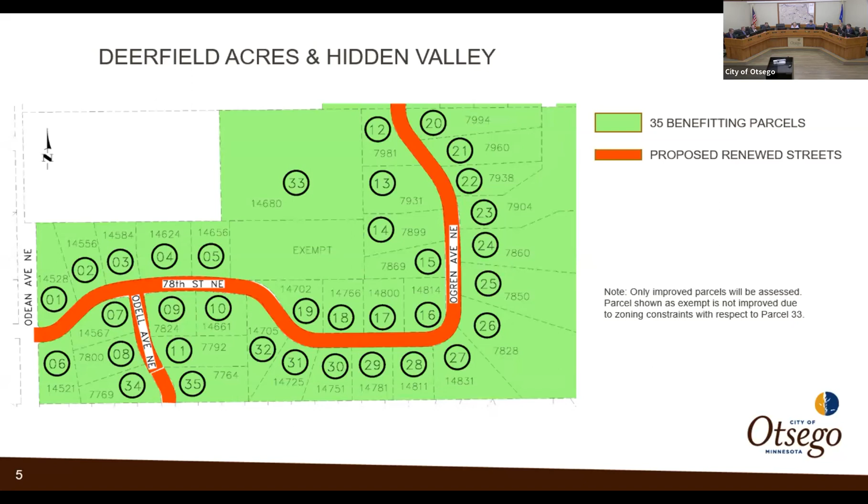If this project goes forward, the reconstruction would happen in 2023. Two years later, we come back and do a fog seal, which is a thin layer of oil that keeps the surface of the pavement from getting too rough early, keeps the fines in it, and seals some of the minor cracks. Then seven years after we've reconstructed it, you'll get a seal coat.

That's a little thicker layer of oil with some rock in it, and then we put a fog seal on top of that to hold the rock in. That lengthens the life of the road and gives a good surface for traffic.

Then 17 years afterwards, we do a micro surface, which is a 3/8 inch thick pavement that fills the cracks and some imperfections within the pavement, and that usually lasts at least another 10 years. So before we'd be back there for an overlay, you're looking at 27 years. Then an overlay would occur, bringing you out another 12 to 14 years, so you're looking at a life cycle of about 50 years.

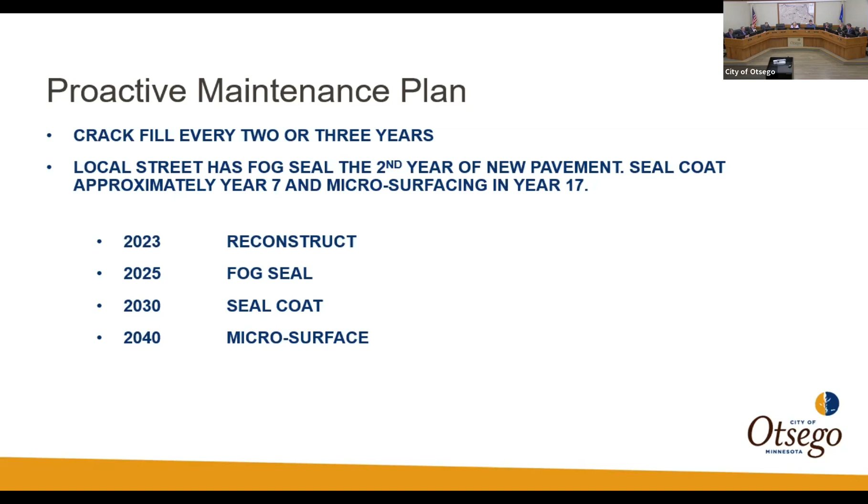As we go through this project, you'll see that the first go-around has been about 50 years. Out there today, Otsego Acres First and Second Additions were paved in 1982, so that's 41 years ago. Then we did an overlay in 1999, which was 24 years ago.

The width of the roads on all these developments is somewhere between 21 and 23 feet. What you do is a pavement condition index every year throughout the city, and that way we know which streets are becoming the worst, so those move up or down the scale for reconstruction.

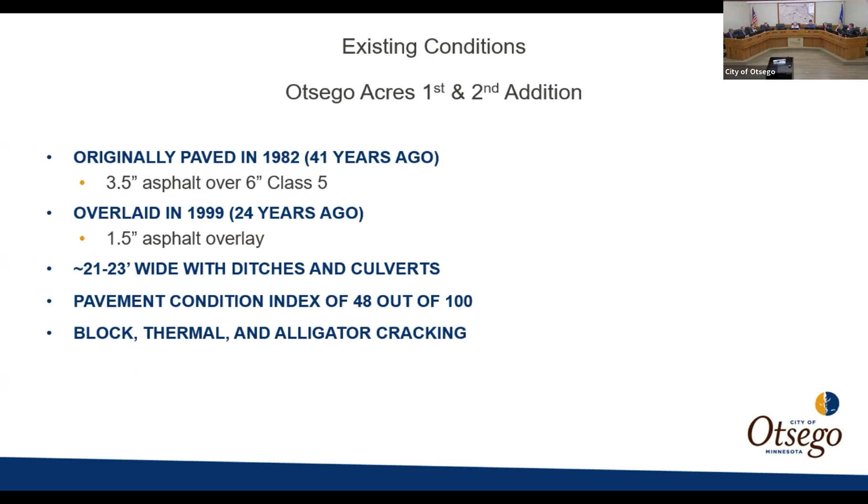Otsego Acres First and Second Addition are some of the worst in the city, at a 48 out of 100. That's why this project is being brought forward tonight. If you've been out there, there's a lot of thermal cracking, block cracking, alligator cracking, and a lot of patches. The same goes for Vasseur's Oak Grove Estates First and Second, and Deerfield Acres and Hidden Valley.

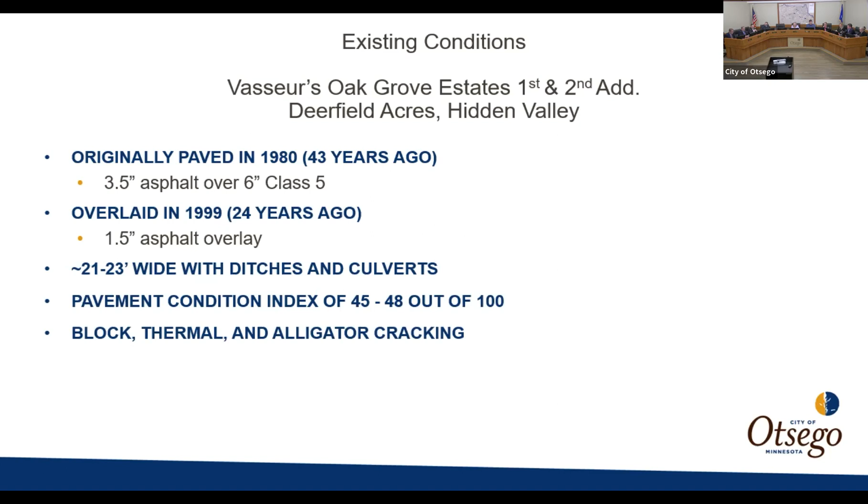Those areas are a little bit older, from 1980. Again, we overlaid it in 1999. They have about the same width of streets and about the same pavement condition index, with similar cracking and patching. Here are some photos of some of the areas—this would probably be Vasseur's Oak Grove Estates.

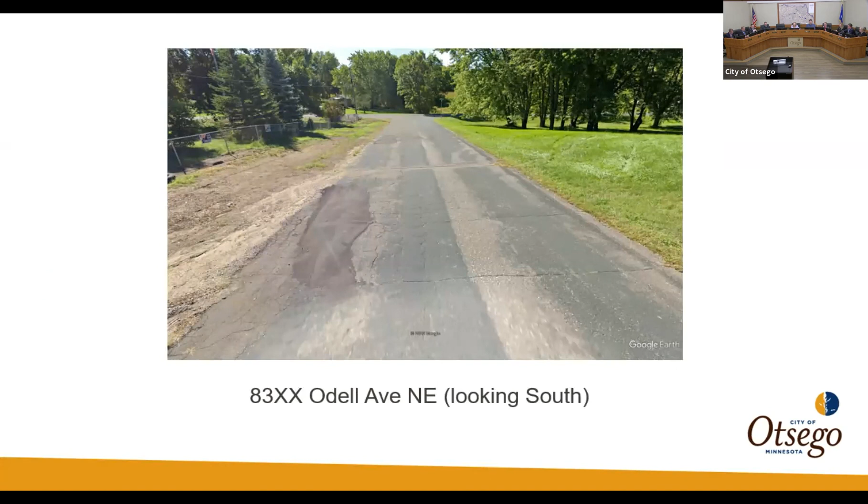So what we're planning to do is reclaim the road, bringing a large piece of machinery out there that grinds the asphalt on the surface and mixes it with the gravel underneath. If there are centerline culverts out there, we're going to replace them because it's already 50 years old, and we want those culverts to last another 50 years without having to rip up your new street.

After they pack that gravel back down and reshape it, you'll still have all the strength that was with that pavement before. Now we're going to add 3.5 inches of new asphalt on top of that, bringing the elevation of the street up 3.5 to 4 inches higher.

We will have to go into some driveways and mill to make that match as smooth as possible. If you have a concrete driveway, we'll saw cut it to the nearest joint and re-pour it to match the street. Gravel driveways are a little easier—we just add some gravel to bring that elevation up to the new road.

We don't expect a lot of landscaping for this project because we're strictly working on the street—redoing the street, putting the new pavement on, and then putting a small shoulder on either side of it.

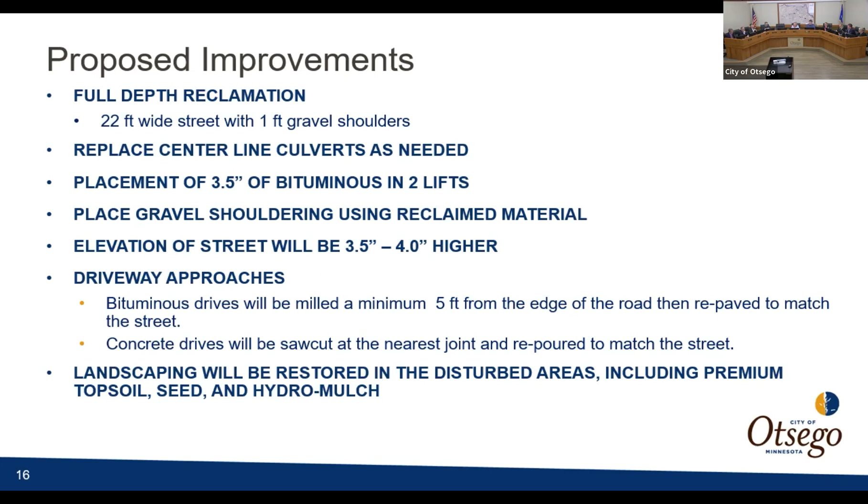So these are typical sections, as if you cut the road like you're slicing bread. Existing right now, it's got about 3.5 inches of asphalt on it with 6 inches of Class 5 below it. That gives a gravel equivalency of about 12, which is how we figure out the strength of streets.

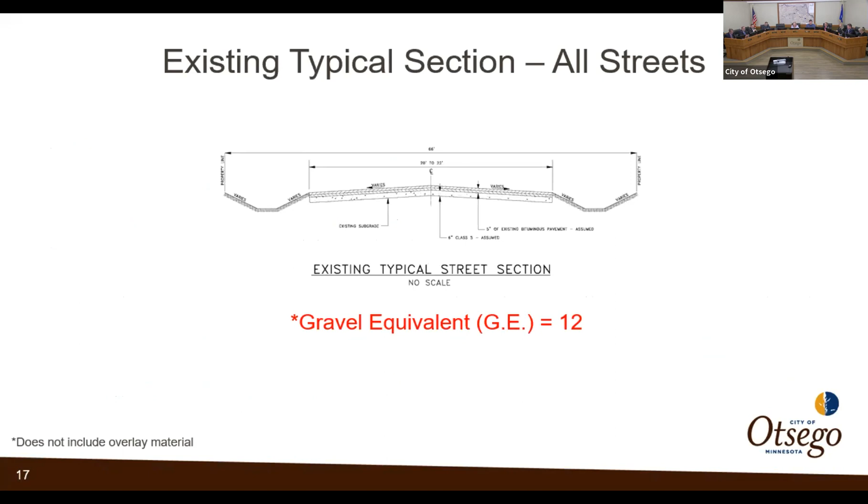In the proposed section, we're turning that existing asphalt, mixing it with the gravel below, and then adding another 3.5 inches of asphalt. So you're saving all that strength by leaving it on site, and gaining about 50% strength, with a gravel equivalency here of 18.

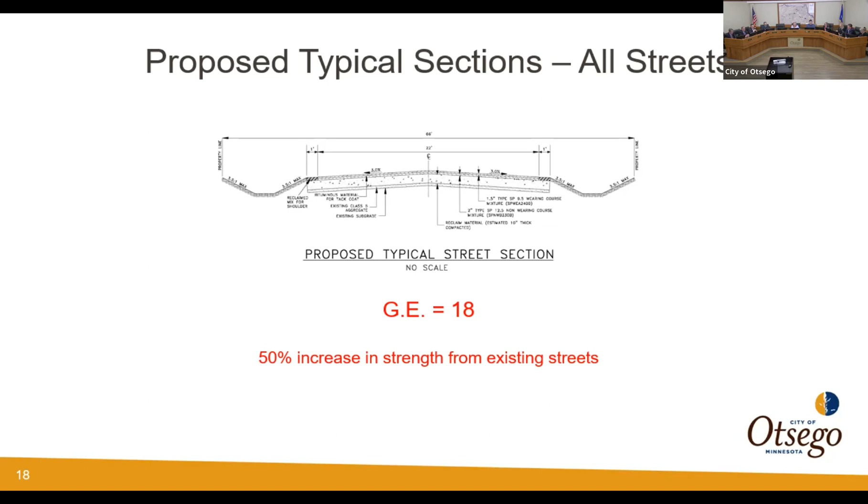So if the project does move forward—right now we've brought the feasibility report to the council back in January, held an open house last week on Wednesday, and we're holding the public hearing tonight. The council has the option to authorize plans and specs tonight, and if they do have us go forward, we'll bring back approved plans and specs for them to approve, then they'll authorize us to advertise for bids.

We would open bids May 3rd. The council would have the option to award the contract May 8th. We'd start sometime in June, with project completion August 18th, so that we're completed prior to school starting again. Then in September we'll hold an assessment hearing.

So the assessment policy changed a few years ago. It used to be 50% to the residents and 50% to the city. Now it's a set rate of $1,092 per lot, so every lot gets the same assessment, but it cannot exceed 20% of the total project cost. So we check that also.

The reclaim project total on here is $1.126 million—that's our estimate. Out of that, $193,284 would be assessed to the 177 properties that we showed you earlier. We expect it's going to be a 10-year amortization, and the interest rate will be determined at the time of the assessment.

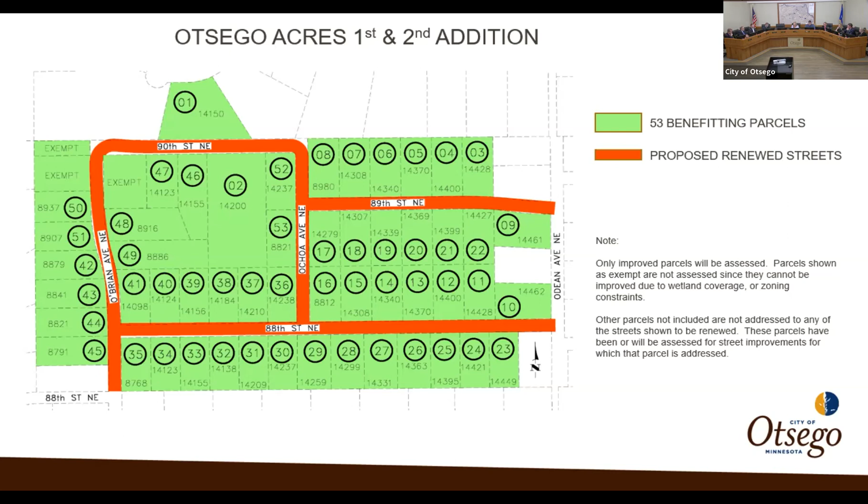That was kind of the main concern—a hill coming down, I think it was Odell or something. It was good that the residents were in attendance. Going forward to Vassuer's, it was in regards to seeing about shaving down. Can you go one forward to Vassuer's Oak Grove, right here on Ogren?

On Ogren coming out to 85th, they had some concerns starting around 8440, 8439, that there's a large hill that comes out and goes into concrete where the path crosses, and it kind of shoots them out. They're worried that another 4.5 inches would increase the hill. So we're going to go out there and also note that with the contractor. Correct.

Madam Mayor, do we anticipate running into any issues with residents getting to their houses or driveways? They'll be parking on the street at certain times but will be able to move. I did talk about that at the open house. When we grind up the road, it's basically a gravel road, so they can use it just as before, a little dustier. We'll try to do some dust control if it's hot and dry, watering it to keep the dust down. Throughout the process, everyone will be able to access their homes and mailboxes.

Thank you. You also shared with them that you'll have a staff member contact for issues, like if a mailbox gets taken out or questions arise on site during the project. Once we hold a pre-construction meeting and get the dates from the contractor on when they're going to start, we send out a notice to everybody along the project, just like you were noticed for tonight, with those dates. My name and number will be in there, along with the resident construction observer, who is out on site daily. So if you have a question, they'll be able to come stop and visit with you and hopefully get that rectified.

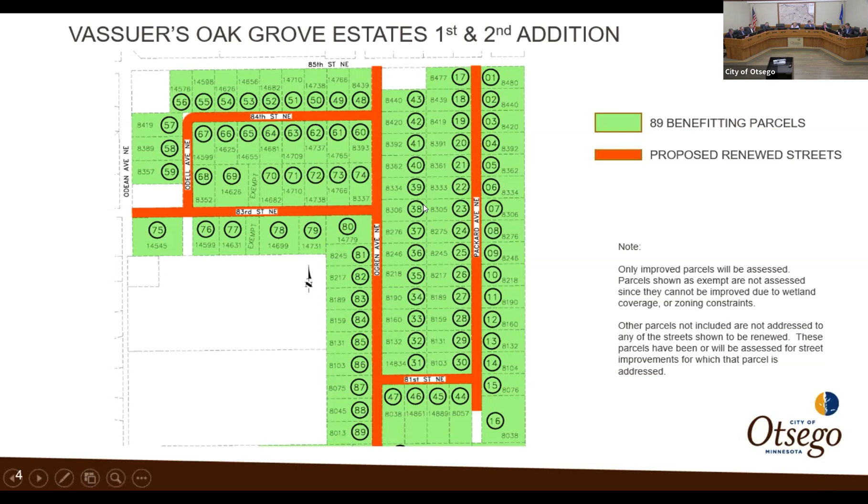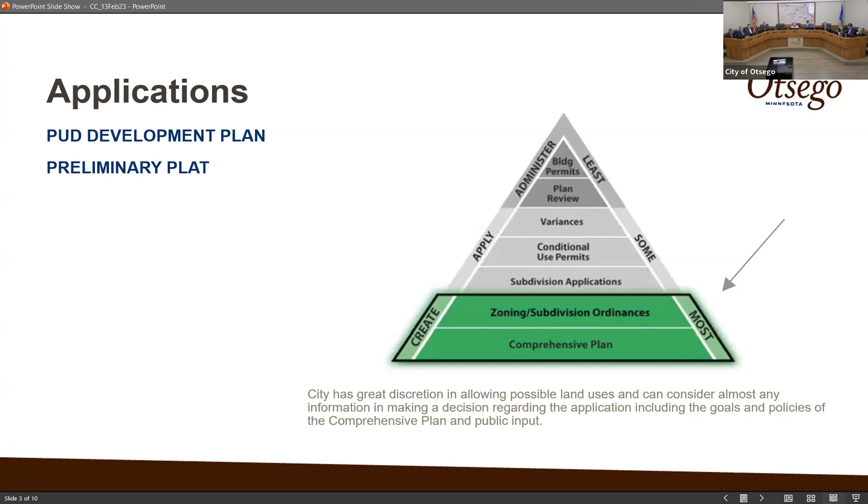Item 5.1 is the Waterfront Commons. I'm going to turn this over to our city planner, Dan. Thank you, Mayor. Steve Fisher from Aero Companies is back tonight to present their proposed development for Outlot C and D Waterfront East, located on the northeast corner of Trunk Highway 101 and County Road 39 interchange. They're seeking approval of a PUD development stage plan for development of the site under the zoning ordinance, and then preliminary and final plat under the subdivision ordinance to create the property.

Again, the property is located on that northeast quadrant of the interchange. It's guided for commercial uses by the comprehensive plan and zoned PUD, Planned Unit Development District, in the mid-2000s as part of a master plan for that entire area east of Highway 101. The most recent, the third addition development plan, had anticipated the entry into the development would feature 4 two-story buildings on either side of 90th Street connected by a skyway over the public right-of-way. Obviously with changes both in the economy, the Great Recession, and commercial development, that plan never materialized. Only the building at the southeast corner of that quadrant basically developed as was originally proposed.

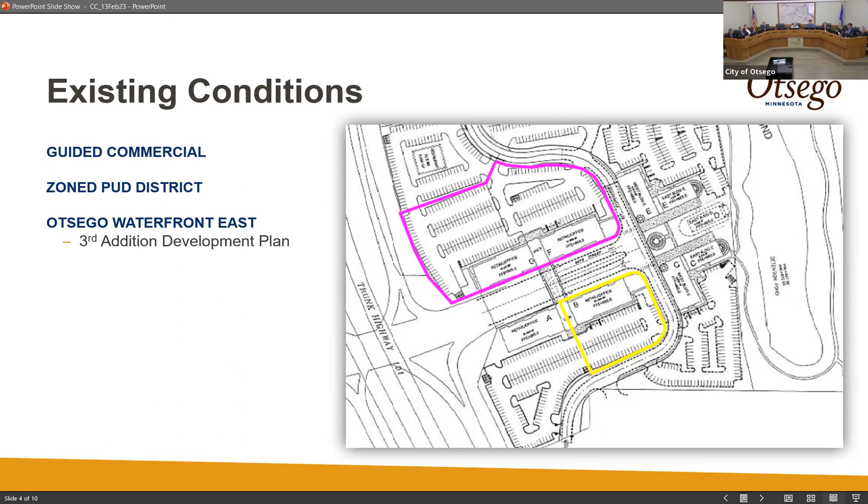The developer's initial proposal was to subdivide the property into 3 lots. They're proposing initial development of lot 1, block 1 at the upper left corner of the parcel, with 2 outlots intended for future development. Based on anticipated traffic that may occur with development of this site and other properties to the north, they are providing additional right-of-way for Quantrelle Avenue should a turn lane be needed in the future as development continues in this area. They'll also extend sidewalks along 90th Street to provide connection between Waterfront East back to the city's park and trail system on the west side of the freeway.

There are utilities available to the site. It's been determined that the existing water and sewer lines in place were outside of their easement. They were put in place during construction of the Highway 101 interchange.

There were a lot of moving parts and the easement was not properly recorded. So the city will compensate the developer for a new easement over the lines in place, with credit back to the city essentially for the developer's use of the area between the utility pipes and the freeway for stormwater basins.

The balance of the property provides for drainage and utility easements at the perimeter of lot 1, block 1 as required by the subdivision ordinance, as well as temporary easements over outlots A and B that would expire when they're final platted and developed. Park dedication requirements for Waterfront East were satisfied when it was initially developed with what was intended to be a private park along the Mississippi River that was later acquired by the city as Carrick's Landing. So no additional park dedication applies to this.

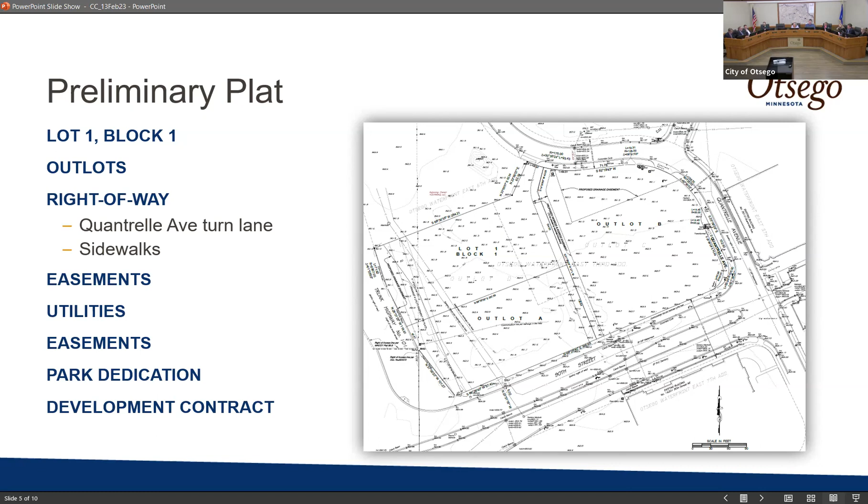With the developer owning and subdividing the property—that's the current property owner—and then selling lot 1, block 1 to the entity that will own and operate that site, the city attorney's office drafted a development contract related to the subdivision, and then a site improvement performance agreement related to the actual development of the site, for execution by those respective entities. That'll occur at closing, with the title company executing all the documents, collecting the fees and securities for the city, and ensuring the plat is recorded.

Site plan for lot 1, block 1 features a 7,700 square foot building, with approximately 7,400 square feet of leasable area. There's a drive-through featured on the west side of the building, allowing opportunity for a convenience food operator. There's an eye clinic intended to occupy the largest portion of the building on the east side, with access both on the east side of the building and the south.

Future phases would include potential convenience food right adjacent to the interchange, as well as another multiple tenant retail building. Those would be subject to future applications for a PUD development stage plan and plat as well. Access to the site is off of Quantrelle Avenue and 90th Street. The 90th Street access requires a U-turn movement to enter, but these roadways have enough capacity to accommodate traffic generated by the development. They've also sized stormwater basins to accommodate the phase 1 construction, as well as ultimate build out of the property.

Signs include a pylon sign at the northwest corner of the property. The original planned unit development for Waterfront East had established an allowance for signage over the entire development, so we've essentially allocated a freestanding sign to this property within those guidelines.

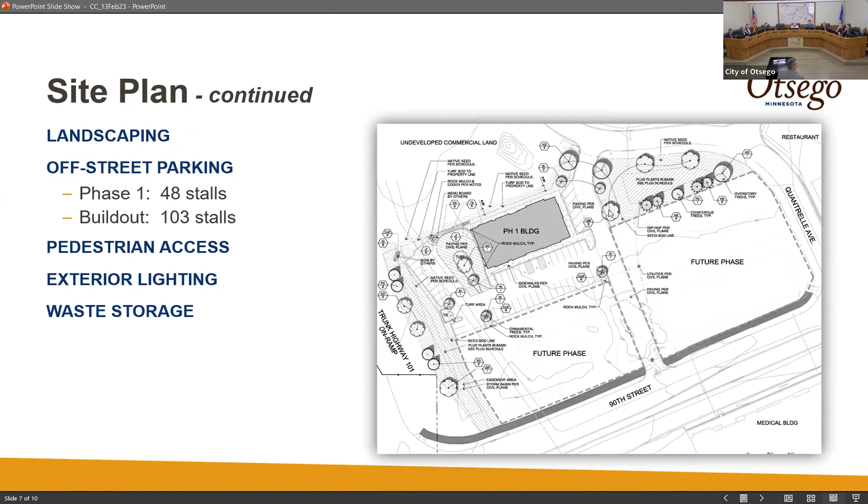One item that we talked about at the planning meeting—could you pull up the site plan just for phase one, a little bit tighter so we can see the parking that we removed on the pond on the outlot B? I don't know if we can see that there. I don't think it shows up on this one. You go back to it... Yeah, it shows that right here. Maybe I'll just walk over and point what I'm talking about. See these dash lines here? The audience can't see what you're pointing at.

Right. Okay, I know planning had a concern about backing up into that aisle. Originally, all the parking stalls were perpendicular to the private drive. So we angled those and removed the parking stalls that would be on the future lot.

I just think maybe that's something we should reconsider—I'll do either or, it doesn't matter to me—but our civil engineer and our architect thought it was kind of foolish not to put those in now, since we widened the drive and we're still making the same motion on both sides of the road. And if we're a little bit short on parking, we'd be willing to add in those stalls. How many are on there, Dan? Is there 5, 6 on that? About 5. So if that's something you'd like to discuss and reconsider, we'd put those in the initial development. To me, it makes more sense to put it in now than later.

As a developer, it just gives us a little bit more of a cushion for parking, and the drive aisle is wide enough, I mean, for safety and for everything. From a safety standpoint, the drive aisle is wide enough, and we were both doing the backing up motion, and there's enough queuing, so unless you see something that you wouldn't want to do that, I just thought maybe we could reconsider that, even though the planning commission did vote to remove those. I didn't want to put them in someday and have somebody come back and say, hey, those aren't supposed to be there. So we'd like to put them in on this first phase, okay?

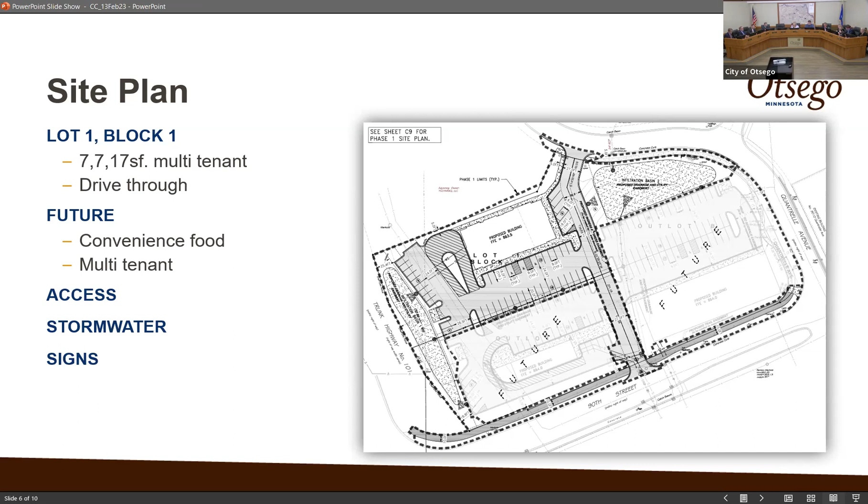With those comments, I would be supportive of putting those in. That's where I stand with it. Everyone else agreed? Agreed, yeah. All right, any other questions or comments? Otherwise, a motion?

Motion to adopt resolution 2023-11 vacating existing drainage and utility easements, approving a preliminary plat, final plat, and PUD development stage plan for Waterfront Commons, subject to the stipulations stated in the findings of fact and decision. Adopt resolution 2023-12 approving a development contract with Otsego Developments LLC, and adopt resolution 2023-13 approving a site improvement performance agreement with Waterfront Commons. Is that one LLC?

Second. Motion by Jeff, seconded by Brittany. Is there any discussion? All those in favor signify by saying aye. Aye. All those opposed, same sign. Motion passes.

Moving on to item 6.1, the well house number 4 water treatment improvement project. I'm going to turn this over to Scott from AE2S, and we also have Kurt still online, correct? Correct. Okay.

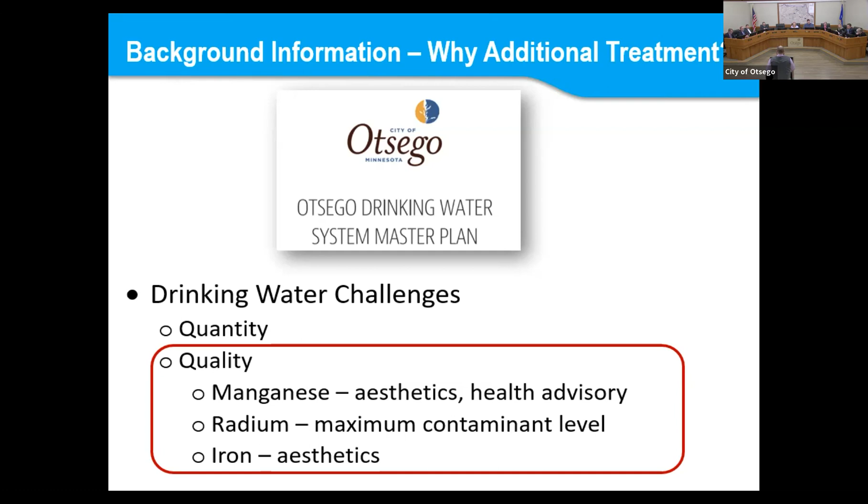So go through a couple of maps here. Just in the interest of time, we chose to focus on the manganese maps.

This map has a mix of red and yellow. The red is not necessarily over the health-based advisory, but it's getting close, or it could be over. The yellow means we're between 75% and 95% of that health-based advisory. If there were any green dots, it would mean we were below 75% of the health-based advisory. So this is our current map based on modeling. With the project completed, we're able to start utilizing that filtration and the enhanced treatment.

With the location of what's currently well house 4, we'll be able to start turning part of that map green, so the green portion is the part of the city we can influence with this initial upgrade. There are actually 4 well houses right now, so this is the first of those.

If you hit the next slide, once we get to well house 3, which is a couple years further on the capital improvement plan, we'll be able to use that water with our near-term water demands to turn the whole map green or yellow, getting to a much better place on manganese. So that's the goal. This is really the first part of getting toward that goal.

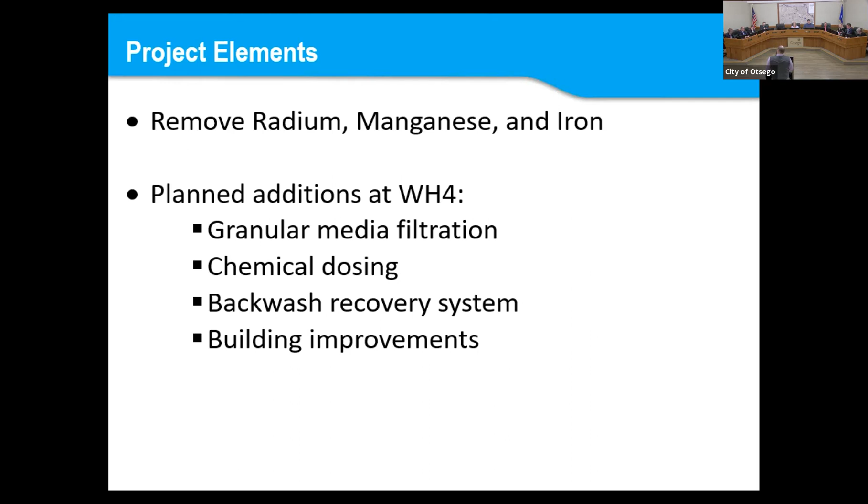Next. So the engineering scope in front of you in the packet includes a few things we'll work on: regulatory coordination, and some grant coordination with that. Really the first major work we'll do is pilot testing. You basically go test what happens with this specific blend of water and chemical dosing. That'll help us determine exactly what we need to put into the system to make it work. So this is basically testing it ahead of time so that we're confident it'll work on the backside.

Then we'll go into the actual design phase and the bidding phase, so that if everything continues to go well, the next time you would see me back discussing this will be when we're asking for authorization to bid the project. Then going into the construction phase, the current contract would go through the bidding phase, and then we would come back once we have acceptable bids and do an amendment to this agreement.

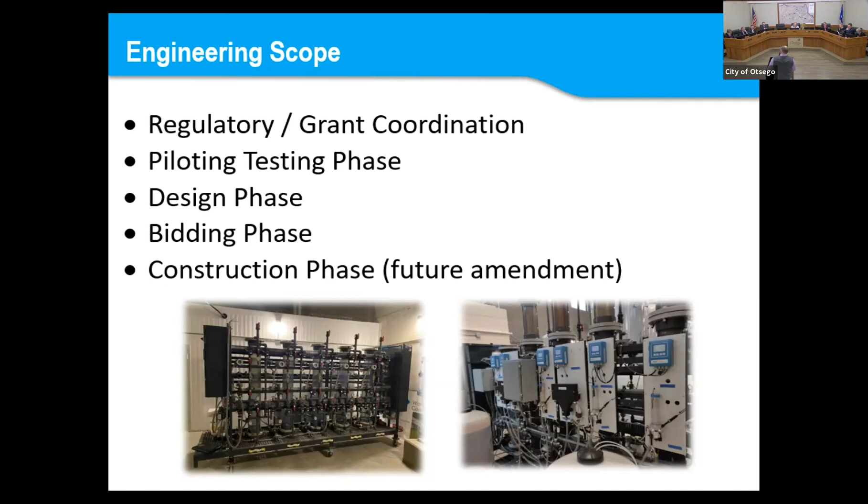Next slide. So just going through it quickly, we're here tonight, February 13th. The piloting phase is over the next couple of months, then going into the design phase and regulatory review, with a current target of bidding this a little less than a year from now and getting those bids in so that we can be doing construction in 2024. I would say our startup, we're targeting early 2025. Probably the bigger unknown with that is just materials procurement and some of the supply chain things that are not quite where we would like them to be right now. But that will continue to unfold, and we'll be able to refine that schedule as we move forward.

So with that, questions? Questions for Scott thus far?

Just have one question, which came up in the subcommittee meeting. The map showing the connection turning from different colors to green shows the connection between Water Tower 4 and the east side. What's the timing of that? Is that between the first phase and second phase, or where does that end up?

Make sure I've got this question right - we're talking about the pipeline between the east and west sides. Exactly, yes. When we did this modeling to generate the maps, we were doing that with that pipeline in place. I would actually ask Ron what the current status on the east-west connection is. That was one of Ron's projects.

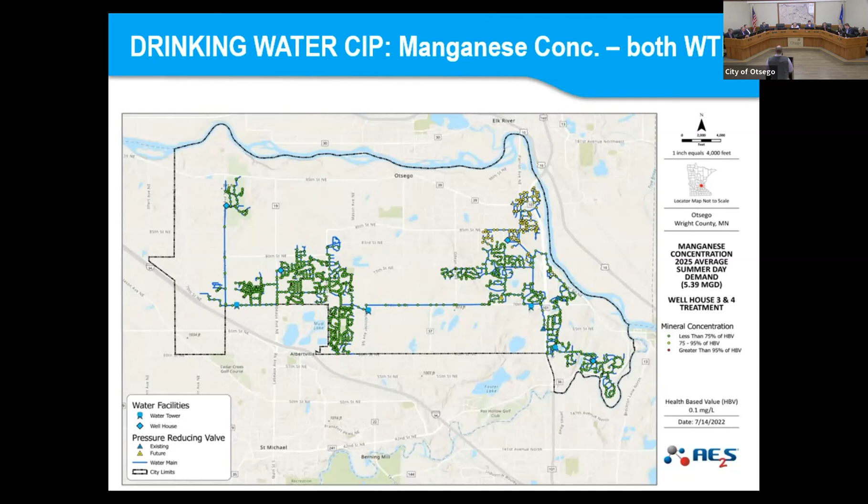I think this is one I'm very pleased about. This is a great, it's a lot of money to help us. It's very nice, exciting to get you started on this. I'm still kind of pinching myself that we actually made it through the gauntlet.

Thank you, Scott, this is very nice, this is very helpful, thank you. And thank you also for being there that day to help explain the project to Amy Klobuchar and her staff that was present. Great job, thank you.

I think we have a motion. Madam Mayor, yes, I would like to move to approve the professional services agreement between the City of Otsego and Advanced Engineering and Environmental Services LLC, also known as AE2S, for the Well House Number 4 water treatment improvements project in the amount of $390,200. A second. Motion by Ryan, seconded by Jeff.